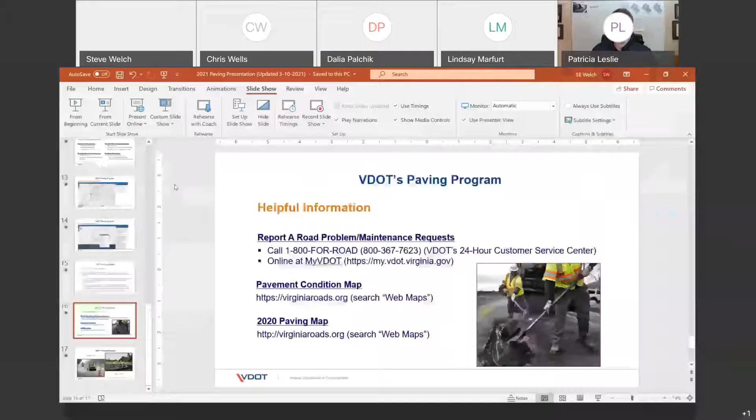All right, for the agenda for this evening, like I mentioned, I'm going to go over the Virginia District's paving program, our paving budget for this year, and a little bit of history on that, the planning and construction for paving, how our roads are selected, how pavement condition ratings are determined. Those are usually two of the big questions that everybody has for us. The types of paving treatments, what we call our pavement dashboard, and then transition into the pavement marking and striping program.

So just to begin, a little background: we have over 14,000 lane miles in Northern Virginia. Over 7,000 of those, or over half, are in Fairfax County. Our other counties that are part of our district are Loudoun, Prince William, and Arlington. In Arlington, they maintain most of their roads. We take care of the interstates and some of the primaries.

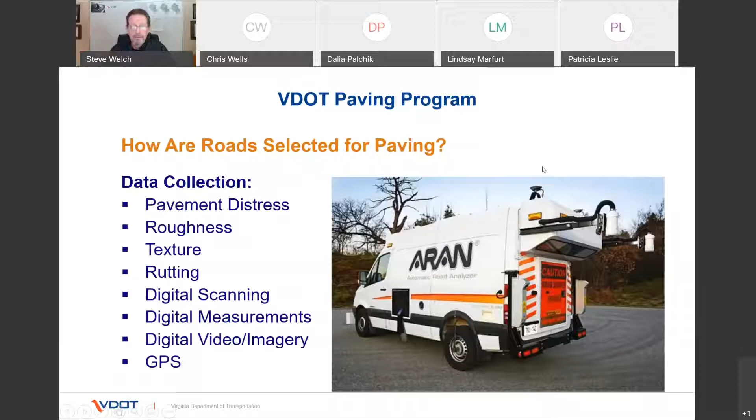It's a very well-equipped van with a lot of sensors, cameras, and data equipment detection on it. It figures out pavement distress, roughness, texture, and rutting. It does digital scanning, measurements, video and imagery, and of course GPS. That's how they literally drive all the roads to collect this data. I'll get to that in a moment.

Once they collect all that data, they put it together into a rating system called the Critical Condition Index, or CCI. That's a scoring ranking that goes from 100 down to 0, and we work from 60 and above up to 100. We want to keep everything at a score of 60 or above as our target goal.

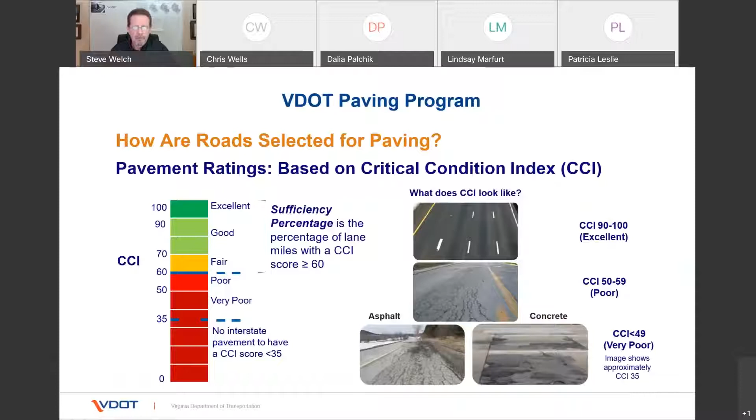When we collect the data, we do this on all the interstate roads and all the primaries. In the past, on secondaries, which account for over half of the lane miles, we could only cover 20% each year, or 100% every 5 years. But beginning this year, we are now collecting data on every high-volume secondary road, meaning greater than 3,500 vehicles daily. So we'll get much better data than in the past, but it still works on a cycle.

Traffic volumes are another aspect we look at. We work with high volume interstate, primary, and secondary routes. We have to keep a goal of 82% of the network having a CCI rating of 60 or greater. Low volume primary routes, less than 3,500, have a goal of 75%. Low volume secondary routes, less than 3,500, have a goal of 60%. Secondary routes are typically neighborhoods, while interstates and primaries are the larger roads, though there are some high volume secondary routes out there.

Looking back at our dashboard over the last roughly 9 years or so, you can see that we've been able to keep the interstate and primary at least at that 82% for interstate and in the range of 75% for primary. We've been playing catch up for many years, and by the end of the 2020 season, we got up to about 60% of the sufficiency rating that we wanted.

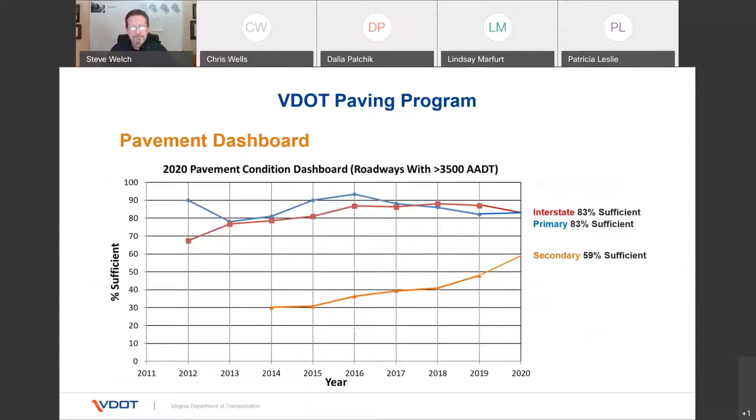So how do we treat these roads? We have two major categories. One is preventive maintenance, where we use slurry seal, a latex, and then a chip seal on top of that. It's a tiny type of rock that's spread and then swept up, and it helps extend the life of pavement for another 4 or 5 years, filling the gaps in time until we can get to all the roads, which is a constant cycle in itself.

Plant mix, we do at 2 levels depending on how bad the road is. We mill as much as 2 inches and then overlay it. With other roads, we have to do a much deeper dig of milling, 2 to 4 inches, and then put back those 4 inches. In some cases, albeit rather few, we'll excavate the entire pavement and rebuild it altogether in a roadway or section of road.

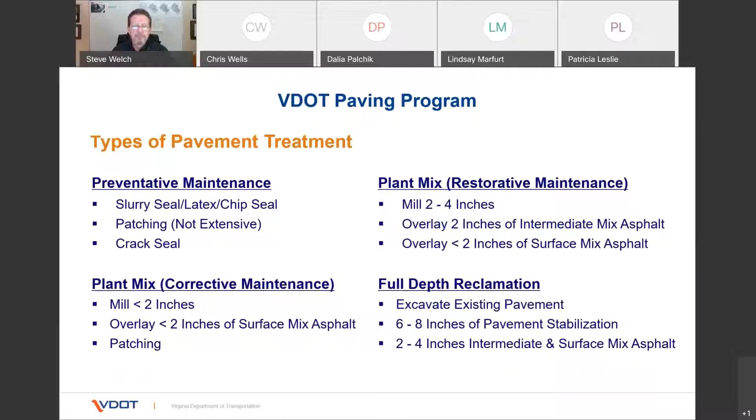Every year we have available online a screenshot of what's called our Pavement Condition Map. On the far right side, we have the condition ratings color coded. This is a screenshot from the 2018 condition ratings: blue being excellent, green being good, and down through very poor being red. On the online map, which you can find at virginiaroads.org, the red represents the very poor roads we're going after, then the poor, and usually the fair, good, and excellent are roads we've already done over some period of years.

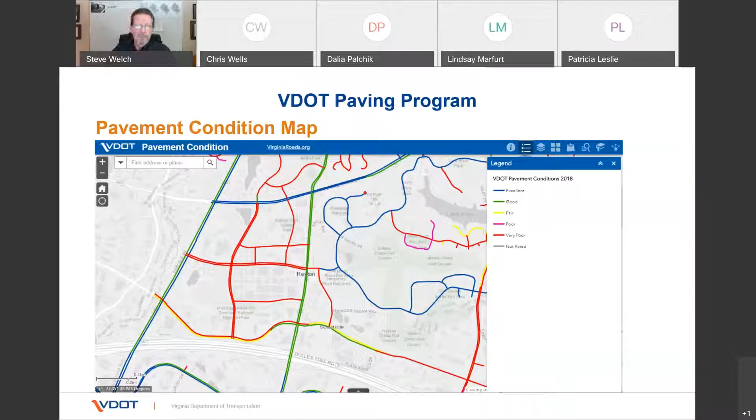I want to point out one thing you see in the condition map, and also in the upcoming map: this is a close-up of the Reston area, and over at the far left is the town of Herndon. You won't see anything colored there because it's within town limits. In other parts of the maps, you'll see empty sections where roads aren't color coded, because they're either private, commercially owned, or non-state owned. This map represents all the state owned, or rather state maintained, roadways.

We also have a pavement status map that's also online, and this is the one everybody will be very interested in as it goes online here within the next few weeks. This is last year's, a screenshot of the same area we were just looking at.

When you go online, you'll be able to click onto one of the roads. In this case, it's showing it clicking to a road down there at the bottom that's blue. Then it pops up the project manager for VDOT and his or her email address and phone number. If you have any questions, you can email that project manager about when your road is going to be done, or about anything going on during the project. So we give our citizens the opportunity to communicate directly that way.

So this is an online map, just a screenshot of it, but this is something you'll be able to find on virginiaroads.org.

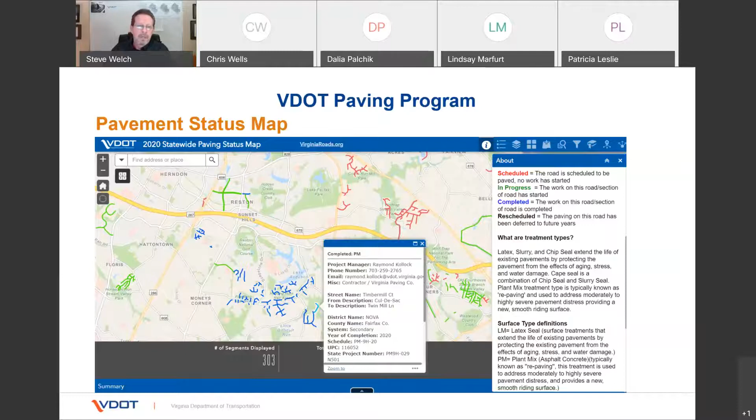As Chris mentioned, whenever we repave roadways, we're milling up the old pavement for the most part, unless we're doing a slurry seal. And we put back generally the markings that are in kind. That's how we set up our contracts.

But at VDOT we do go through and look at some places where we might need to adjust a crosswalk, add an edge line, or lengthen a turn lane or a taper for a right turn lane, to help make the conditions a little safer and help out with the markings on the road.

And lastly, we coordinate with Fairfax County Department of Transportation and work with Chris and his team to seek opportunities where we can change the markings during the repaving operations, because that's how we get economies of scale, where there might be opportunities for what we call a road diet. In some cases we have a 4-lane roadway that might end up not being used as heavily by vehicles as it was once built for.

And we do some analyses and sometimes end up taking 2 of those lanes out and converting them, through Chris's program, into shared lanes, bike lanes, or buffered bike lanes. Sometimes we'll use the middle area depending upon the configuration, and also coordinate planned pedestrian improvements such as new crosswalks.

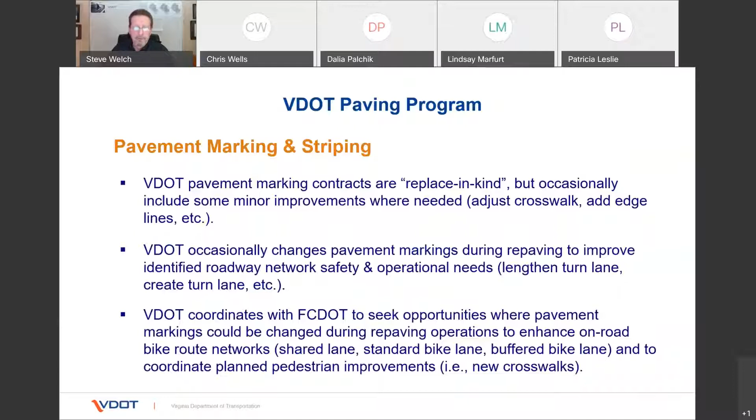So lastly, I just wanted to briefly go over the paving program. It's a lot of information to take in, but if you ever have any concerns, inquiries, or a complaint, you can reach us at the 1-800 number, or more easily at my.vdot.virginia.gov. Again, the Pavement Condition Map and the Paving Map for the upcoming year can be found on virginiaroads.org.

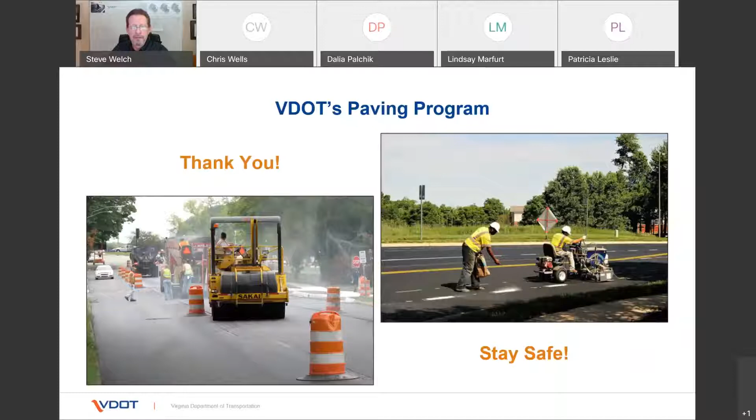Okay, Chris. Yeah, sorry, unmuting. That's okay, thank you. Thank you, Steve. I'll pull up my screen to share. Actually, for bandwidth reasons, I'm going to turn my video off and then pull my screen back up to share. WebEx won't let me do that.

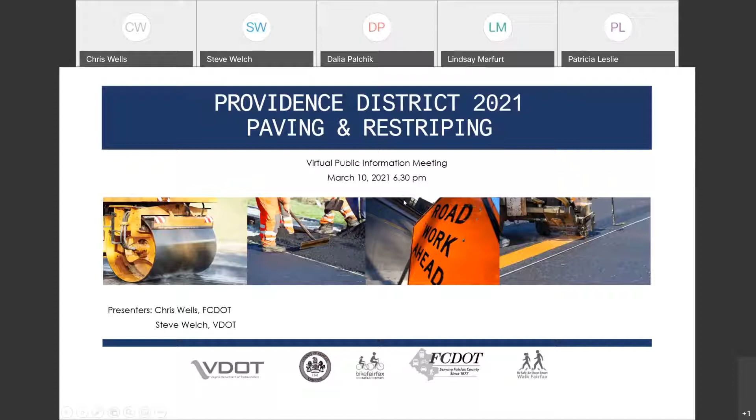Our basic role in this is to look for opportunities for striping modifications, and then go over those with the public, with the Board of Supervisors member, and with VDOT Traffic Engineering to see if these ideas are implementable in the real world.

We're trying to do it to improve safety. We're also trying to do it to build out a bicycle network. We have traffic in Fairfax, and so everything we can do to allow people to take trips other than by single occupancy vehicle is definitely where the county wants to be.

We know that for years we focused on bicycle commuters, but there's really a missed opportunity for people to make short trips in their neighborhoods to the stores, places of worship, schools, things like that, if they could get around safely by bike. We, as a county, established a bicycle master plan, and one of the goals of that plan was to establish a bicycle network.

As part of doing this, we try and make these facilities safe and comfortable. Typically we're talking about residential streets. In the early years of the program, we were picking up some of the 4-lane divideds that not all bicyclists feel comfortable on, but some do. Again, we're trying to build out a network combined with our off-road trail facilities that folks can get around on.

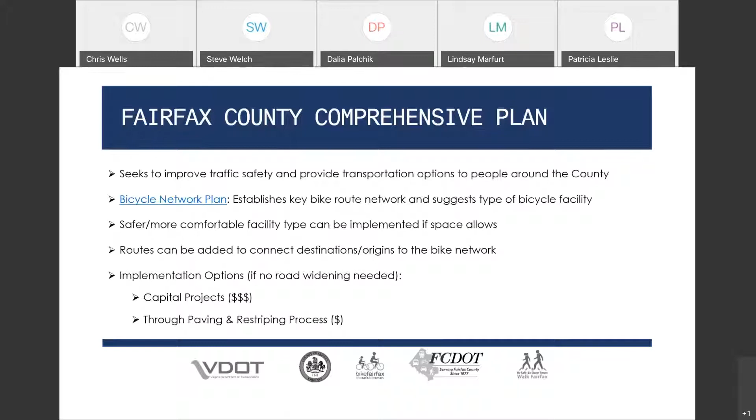Whereas our capital projects, building trails and sidewalks, cost millions and millions of dollars, and those costs keep going up as things get more complicated these days. So this is really a great use of the public sector's efforts to do things efficiently on behalf of the citizens.

So what I mentioned about cyclists is in America for 40, 50 years now, unfortunately, we made the choice to focus on the type A cyclists, the confident cyclists, those that would ride on road no matter what. And that's where we put our bike lanes. Unfortunately, the result was we didn't get that many people to ride bikes.

So we know that today there is a huge part of the population, 53%, that's interested in cycling but concerned about their safety. They're looking for something comfortable and safe to be on. Someone like myself, who's a weekend warrior so to speak, I'll feel comfortable riding on some roads, but definitely not high speed, high volume roadways.

So what we're trying to do is build a network, build a future in this county where families, folks with children, folks with differing abilities have a comfortable place to bicycle. These residential streets where we can provide bike lanes are part of that vision, in addition to building off-road trails.

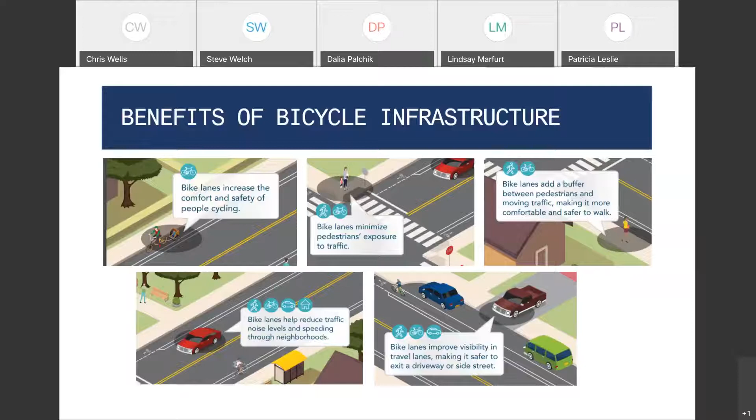And then lastly, but as important, if your house fronts one of these roadways, your sight distance to pull out of your driveway is actually improved, because the vehicles are now in the center of the roadway, and so that sight distance triangle that us engineers use gives you much better visibility of the roadway.

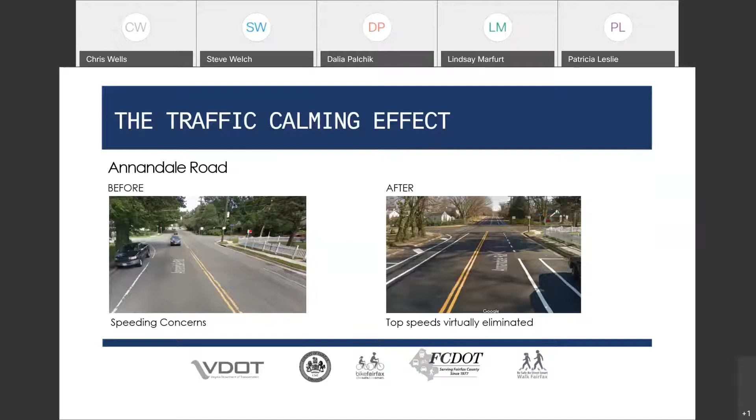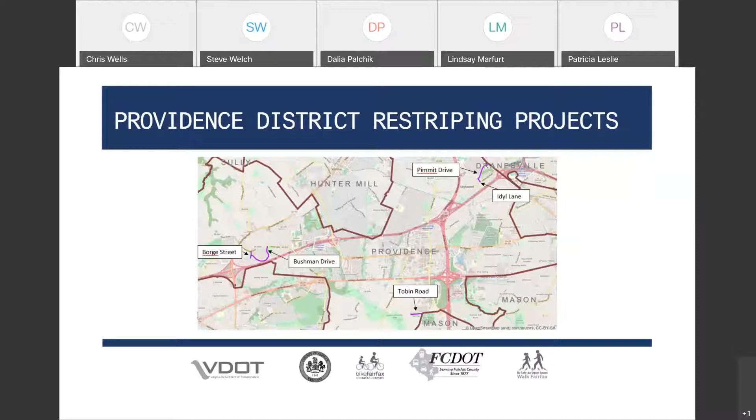So tonight, 2021, we're building off of years of building out this network. At some year we'll come here and there won't be any roads left, because we will have found all the wide roads. But for tonight, of the roads being paved in the Providence district, the ones identified as candidates for striping are Borge Street and Bushman Drive, adjacent to each other off of Blake Lane; Pimmit Drive and Idyl Lane, adjacent to each other off of Route 7 and Idylwood; and Tobin Road off of Woodburn Road.

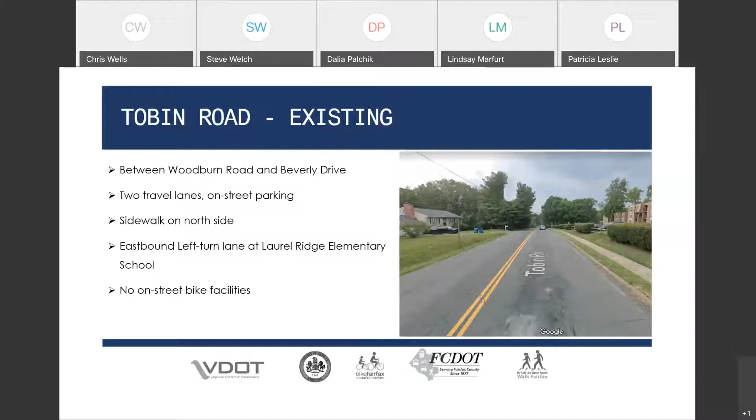Starting with Tobin Road, we propose that between Woodburn Road and Beverly Drive, the current existing conditions are 2 travel lanes with on-street parking and a sidewalk on one side, with no bike facilities. We'd move to a proposed condition on Tobin where we'd add bike lanes in both directions, and the on-street parking would remain on the north side but be removed on the south side.

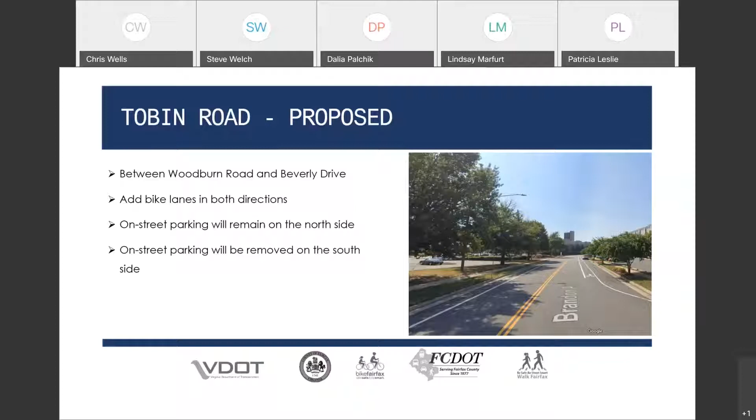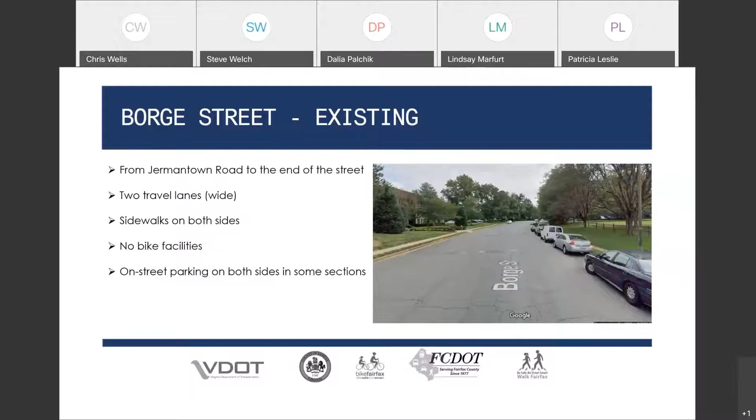On Borge Street, from Jermantown to the end of the street, it's currently 2 travel lanes wide with no striping. It does have sidewalks on both sides, some on-street parking on both sides, and no bicycle facilities. The proposed striping for Borge Street would add striping for the parking lanes, the bike lanes, and the center line as well. This also has the benefit of improving access to the upcoming 66 parallel trail being built as part of the 66 widening project, which will run from Gallows Road, Dunn Loring Metro, out to Centreville and west.

And I should emphasize this: we almost always look to maintain all the on-street parking in areas which are heavily parked. In the previous example, Tobin, we're talking about a single-family residential section that doesn't have a lot of parking demand on street. But certainly on Borge Street and Bushman, these are heavily parked streets, and we would not ever want to remove the parking associated with those.

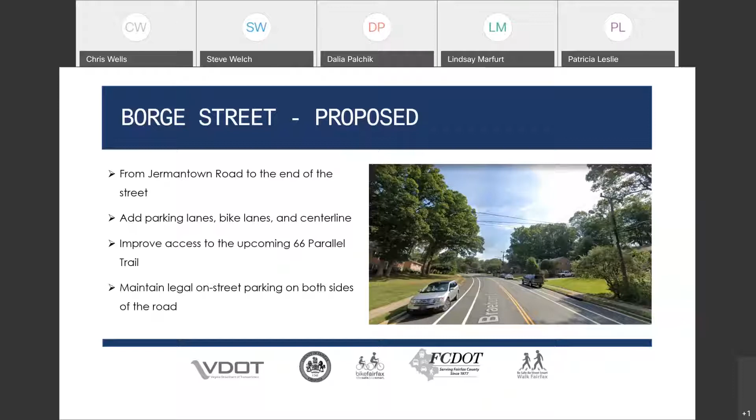Now, with the engineering that goes with this work and with adding crosswalks, it's possible there are some slight modifications to the areas that are parked—areas that are probably illegal to park in today, like around bus stops and crosswalks. The striping, though, will identify that better so folks know it's boxed out at the end, and you're not supposed to be parking in a bus stop, for instance.

Bushman Drive, same neighborhood, from Blake Lane to Borge Street. Currently it has 2 travel lanes, sidewalks on both sides except at the Blake Lane Park, and no bicycle facilities.

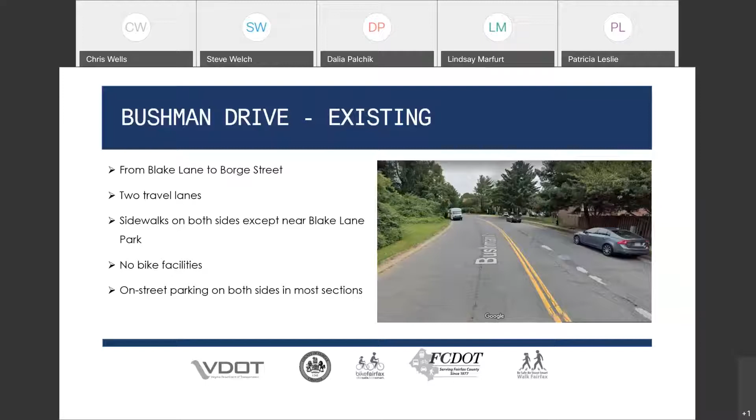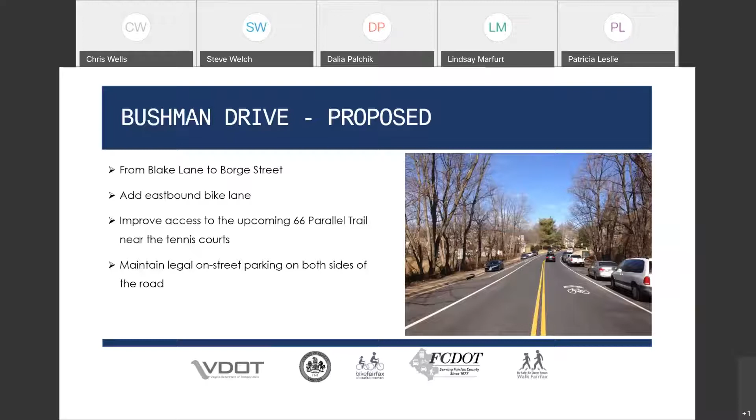On-street parking in most sections on both sides. The proposal would be to add a bike lane in one direction, the eastbound direction, along with parallel parking striping. In the direction where there's not a bike lane, there would be a Sharrow marking. This feeds into the I-66 trail, leaving all the legal parking area intact.

Pimmit Drive, which isn't exactly in the Tysons area, has very high density residential development, two high-rise towers and a huge garden apartment complex off of there. So that's a very dense area that can benefit from bicycling facilities to get out to Route 7.

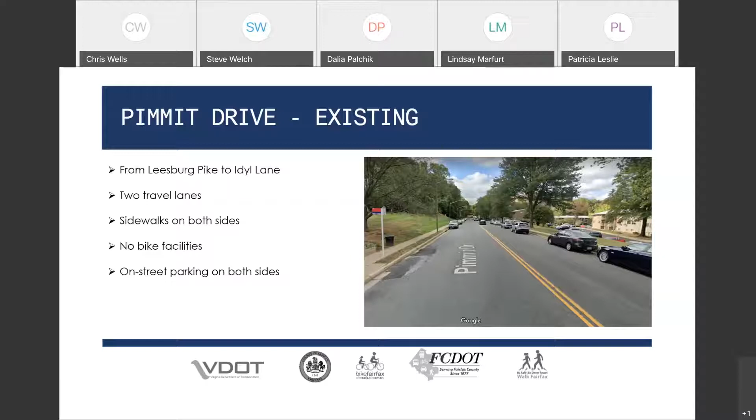It's currently two travel lanes wide with sidewalks on both sides and on-street parking. The proposal here would be to stripe in and box in all the legal parallel parking spaces, and add bike lanes in areas where it permits, which is most of it. There are some areas with a pinch point where we'll probably have to do sharrows.

One important thing to note here for the community is that we would need to remove the on-street parking along the Idylwood Plaza frontage—that's a shopping center with a big parking lot. We believe that's not a negative for parking, and it might even be a positive for the community, but that's something we highlight in this public process.

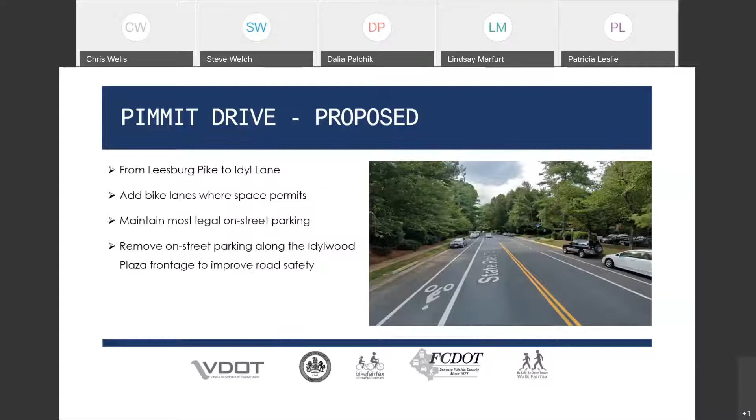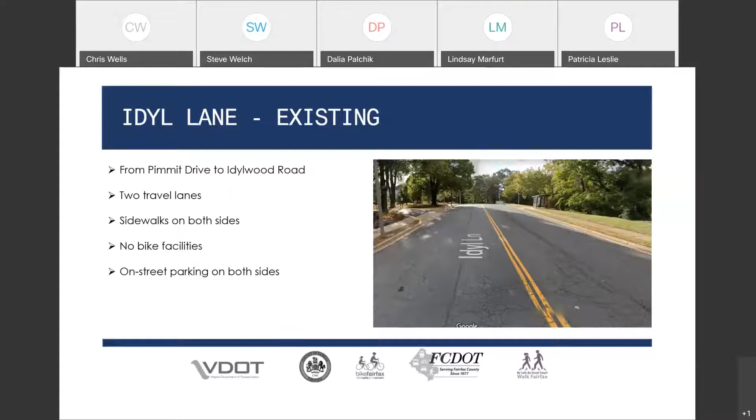Lastly, a 90-degree intersection with Pimmit is Idyl Lane, which takes it out to Idylwood Road—so Pimmit Drive to Idlewood Road. Again, two travel lanes, sidewalks, no bike facilities, on-road parking. The transition would make it bike lanes in both directions, maintain the legal parking on the east side, and remove the parking on the west side.

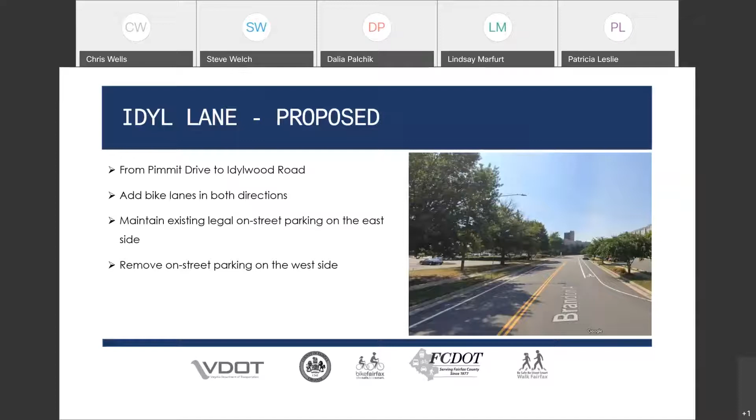One thing we've upped our game on in this process over the past few years is pedestrian safety. As staff, we look at the existing crosswalks and scan the roads being paved for any opportunities where we think crosswalks might be needed, such as pedestrian generators like schools and activity centers.

One of the important parts of this public meeting tonight is to also get your feedback. So if you see some of the roads being paved where you'd like to suggest crosswalks, that's part of the input process we'd like to see.

But then there are other tools in our toolkit also, such as signage and safety improvements, and in priority instances, doing some concrete work that the county can do. The challenge and the benefit is to match it up with the striping at the time the road's going to be striped.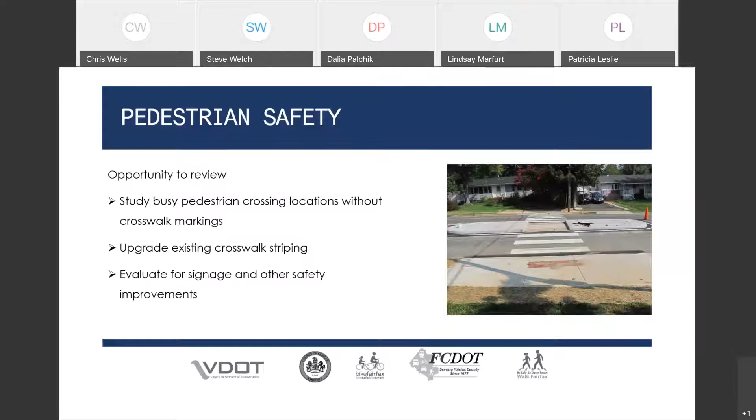So with that, this presentation, by the way, these presentations will be posted on our webpage. For paving related comments, we ask that you reach out to VDOT through their My VDOT portal, at my.vdot.virginia.gov, or call their 1-800-FOR-ROAD number. For striping related comments, reach out to us at the Fairfax County Department of Transportation.

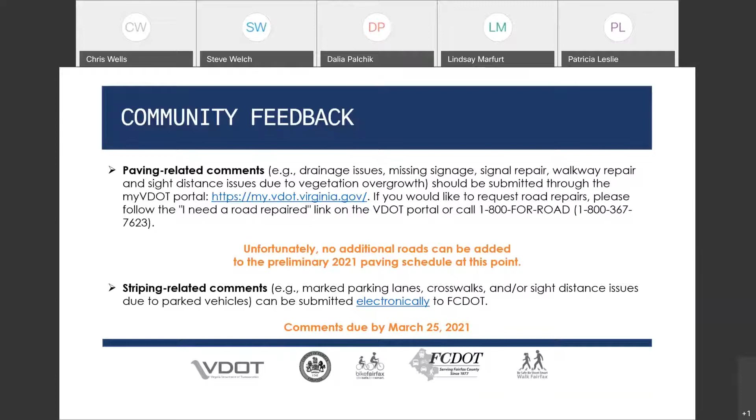Once that link is on the webpage, it takes you to the feedback form. Our web pages are up for this right now, so if you just search Fairfax County's web page for paving and find the 2021 paving, you'll be able to find the ability to contact us through those.